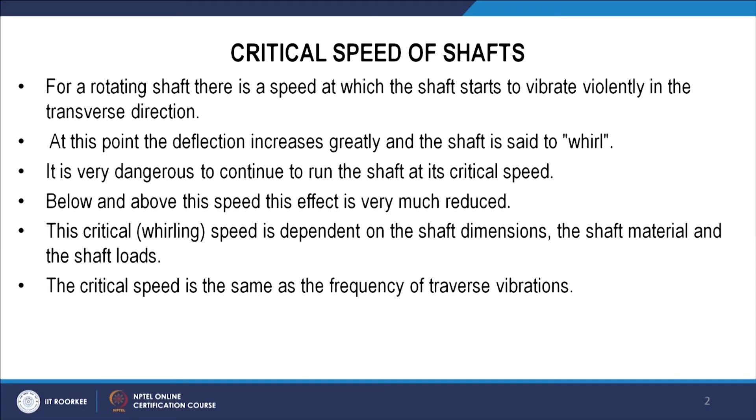When we start the shaft and it rotates, there could be some speed at which its vibration amplitude, that is the transverse vibration amplitude, could be very large, or the shaft can vibrate violently. This speed we call the critical speed of the shaft, and when the shaft is rotating at this speed, its amplitude will continuously grow, and it could be quite dangerous to run the shaft at or near this speed. Below or above this speed, the effect is much reduced, and therefore the amplitude of transverse vibrations are reduced.

So what is this critical speed, and we should try to understand why this type of phenomenon occurs in shafts.

So we can see here, if we have a shaft - these are bearings and this is the shaft, and here is a disc in the middle. We consider the shaft as a light shaft, so that compared to the mass of the rotor, the shaft mass is negligible.

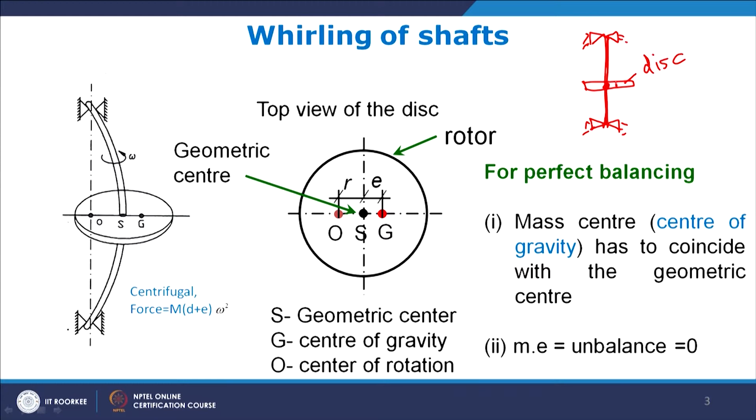However, most of the time, due to manufacturing inaccuracies, the center of mass of the disc is shifted away from its geometrical axis. So it means that if this is the geometrical axis, the center of mass could be here - let us say G. So when G is here, it means the shaft is rotating about one axis and its mass is acting at a different point.

Due to this, there will be some unbalance of the forces in the system, and that will generate the vibration.

So let us say this is O. Now the shaft is rotating with omega, some angular speed. O is the point that is on the center line of the bearings. This is S, the geometric center of the disc, and G is the mass center or center of mass or center of gravity of the disc.

Let's assume that this difference between the geometric center and the mass center is E. This E is called the eccentricity - that is the radial distance between the mass center and geometric center of the disc.

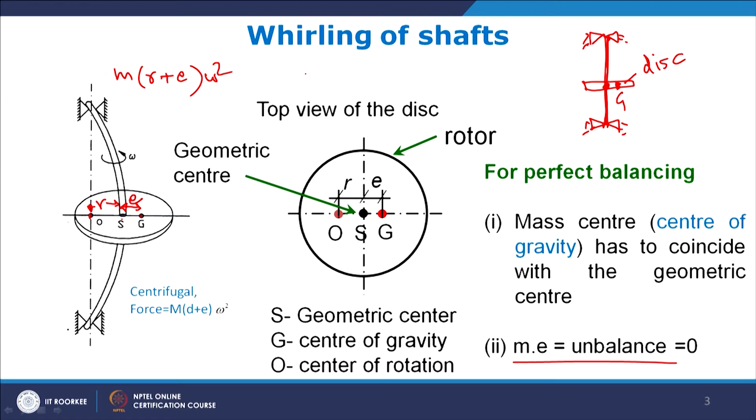Now the stiffness of this system in transverse direction at point S is, if the stiffness is K, transverse stiffness K, and the radius is R, then the restoring force is K into R. So m(R plus E) omega square is the centrifugal force, and the restoring force or shaft resistance force is K into R.

If we assume the bearings at the ends as simply supported, then stiffness K equals 48 EI by L cube, because delta equals P L cube by 48 EI for supports at the ends, and from here we can find K equal to P by delta, that is 48 EI by L cube. So K, the stiffness of this shaft, is 48 EI by L cube.

So for the equilibrium condition, these two forces will be equal.

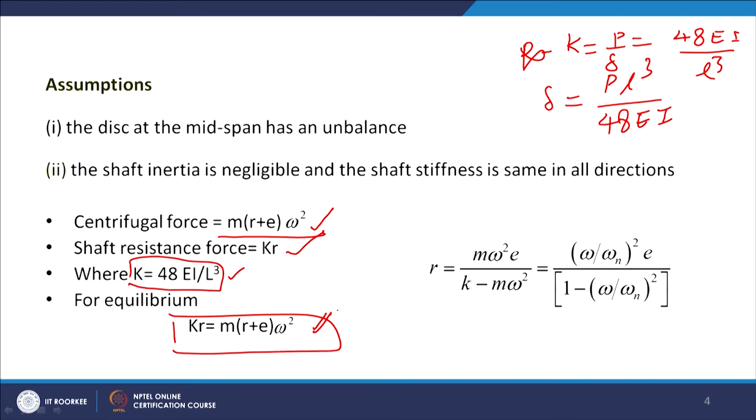So Kr equal to mr plus E omega square, because the shaft is rotating at some speed omega at some distance r, and its mass center is at r plus E from the axis of rotation or the center line of the bearings. So when we balance these two, we will find Kr.

So Kr equal to m r plus E omega square, and from here we will find R. R into K minus m omega square equal to m omega square into E. So from this we can find R equal to m omega square E upon K minus m omega square.

And then we take this K by m, we take this m here, so we have this k by m. So k by m is omega n square. So omega n equal to root k by m. So omega n square equal to k by m. So we can replace k by m with omega n square.

And we take omega n square out. So we will have omega upon omega n square into e upon 1 minus omega by omega n square. So we will have this expression finally that tells us that if the shaft is rotating at this particular speed omega and it has some eccentricity e between the geometric center and the center of mass of the disk or the rotor, and omega n is the natural frequency of the system, then the shaft will rotate with some transverse amplitude r. So r equal to omega by omega n square e upon 1 minus omega by omega n whole square.

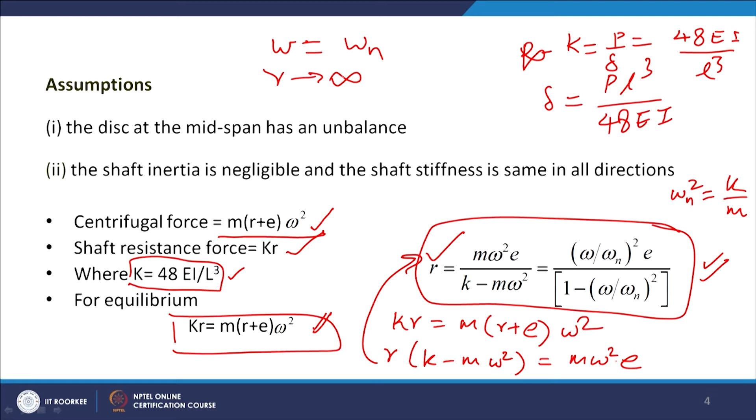Now here we can see that if we have omega equal to omega n, we will have r tending to infinite, meaning the amplitude of vibration will be infinitely large, and this we can see from this frequency curve.

We have here r by e plotted with respect to r, that is omega by omega n. So this r is different: this is the frequency ratio omega by omega n, and this r is the distance of the geometric center from the center line of the bearings.

So we can see that when omega by omega n is less than 1, we have here r by e, and at exactly 1 we are tending to infinite, and then when omega by omega n is greater than 1, we have r by e tending towards 1.

So here, when we have omega by omega n less than 1, or omega less than omega n, we will have this configuration, that is the center of mass is outside of the disk, so the heavy side is here. However, when omega by omega n is greater than 1, or omega is greater than omega n, we have the light side here.

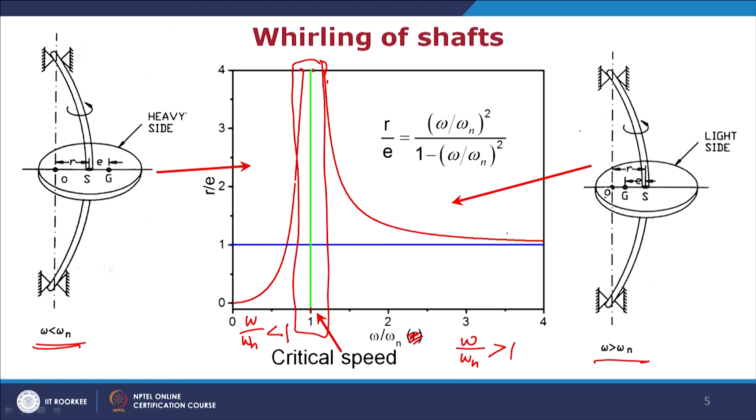Now there could be the presence of damping, and the damping could be due to air resistance, because usually the shafts rotate at very high speed, so the air resistance could be quite high, and therefore there could be damping due to air resistance, or there could be some material damping in different types of applications.

So if there is some damping in the system, then we have to understand that there will be one more force acting on this system due to the effect of damping. And we can understand from here that when there is damping, this point O, S and G will not be in one line, but there are three forces.

So there will be these three points: O, S, G. And we can see that the centrifugal force that acts on G will be acting here, that is m omega square A, where A is the distance from point O to G, and the spring force or restoring force is K into R here, that will work on the geometric center of the shaft.

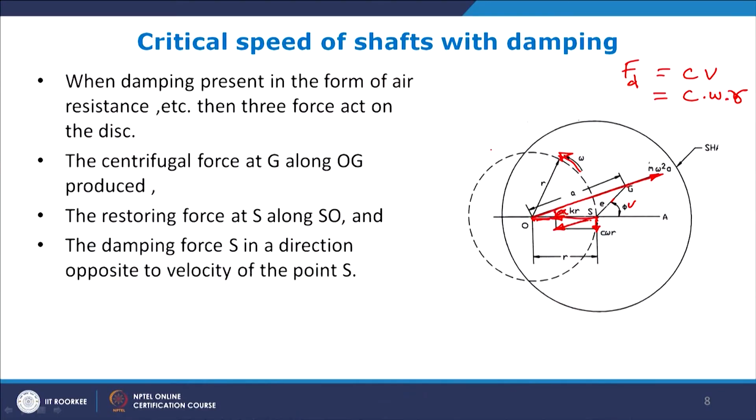Now for the forces, if we want to balance the forces in x and y direction, sigma x equals 0 and sigma y equals 0. There will be some torque acting opposite to the motion of this shaft, coming due to this damping effect, because this damping effect generates torque that opposes the rotation of this shaft. Therefore we need some power source to rotate this shaft against this torque. So for this system we balance forces in these two directions to find these two equations.

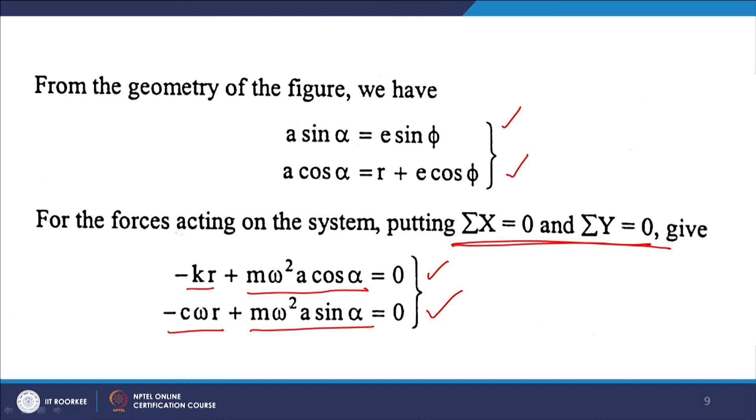One is minus Kr, and then the component of the centrifugal force cos alpha, and here, because this damping force is perpendicular to this restoring force, the sin alpha component of this centrifugal force. By solving these equations, we can get R by E equal to this expression.

So now here we see R by E equals, where omega by omega n is the frequency ratio. Let us say this capital R squared upon 1 minus capital R squared, whole squared, plus 2 zeta r whole squared, under root. And tan phi is 2 zeta r upon 1 minus r squared, where this damping ratio is c upon 2 root km.

If we compare these expressions, we have already seen in the lectures when we discussed vibration due to rotating unbalance, we found x upon m0 E by m equal to the same expression. When discussing the shaft, m0 and m are both equal, and x equals r. So we have the same expressions.

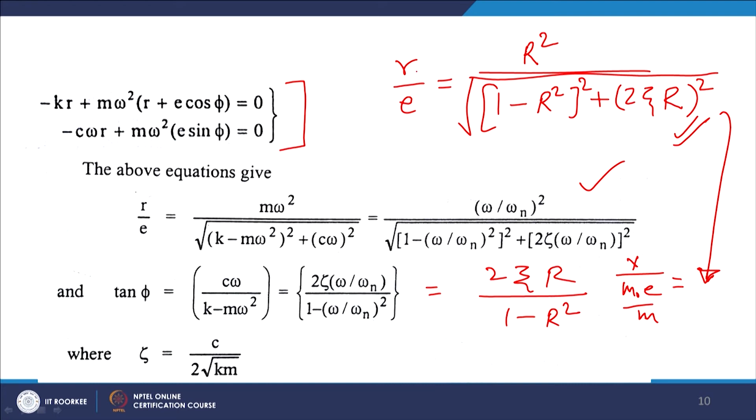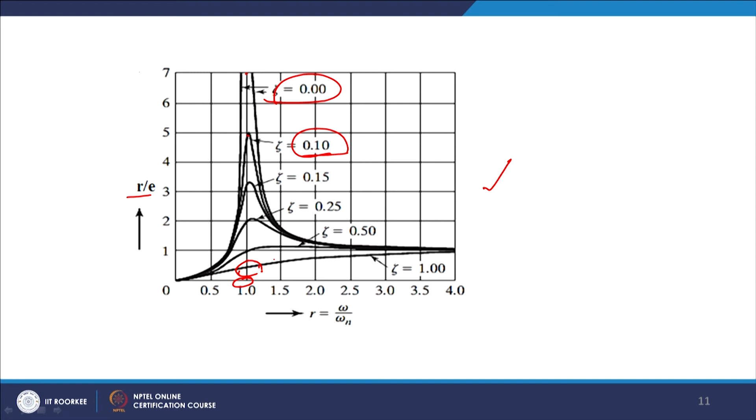Now if we discuss the frequency response curve, this is the same frequency response curve, here it is r by E. We can see the effect of damping: when we have some damping due to air resistance, even at critical speed, that is omega equal to omega n, our amplitude of transverse vibration is not infinite, but finite. When damping is 0, we have infinite amplitude, but with finite damping, even small damping of 0.1, at the critical speed the amplitude is finite, and as we increase damping, the amplitude reduces. So if we have damping in the system, even at critical speed, we have lower amplitude of transverse vibration.

Now we will perform one numerical example to use this concept. Here we have a rotor having a mass of 5 kg, mounted midway on a 1 centimeter diameter shaft, and that is supported at the ends by 2 bearings.

The bearing span is 40 centimeters, so the length of the shaft is 40 centimeters. Because of certain manufacturing inaccuracies, the CG of the disc is 0.02 mm away from the geometric center of the rotor, so E is 0.02.

If the system rotates at 3000 rpm, that is the speed of the shaft or disc, find the amplitude of steady state vibrations and the dynamic force transmitted to the bearings. Neglect damping. Take E, the Young's modulus, equal to 1.96 into 10 power 11 Newton per meter square. So we have to solve this problem.

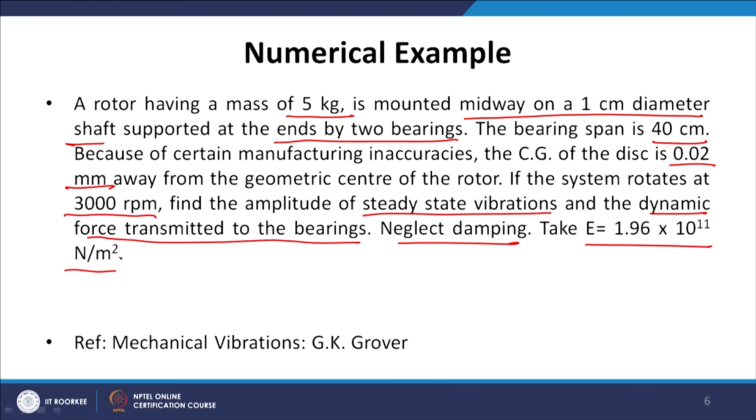So here we are given M equal to 5 kg, the mass, and diameter equal to 1 centimeter, that is 0.01 meter, and then we have length of the shaft, that is 40 centimeter, so that is 0.4 meter.

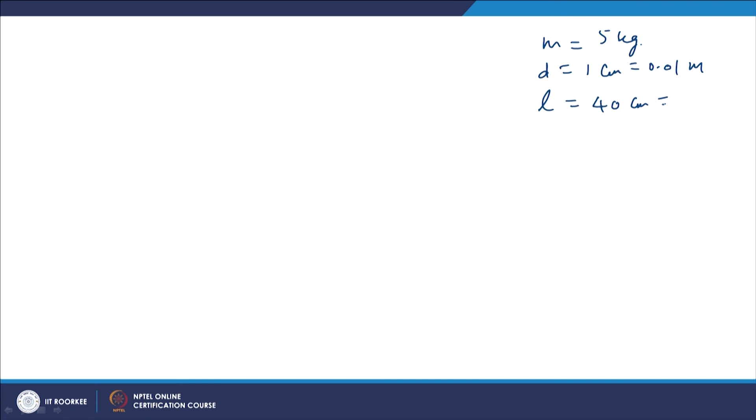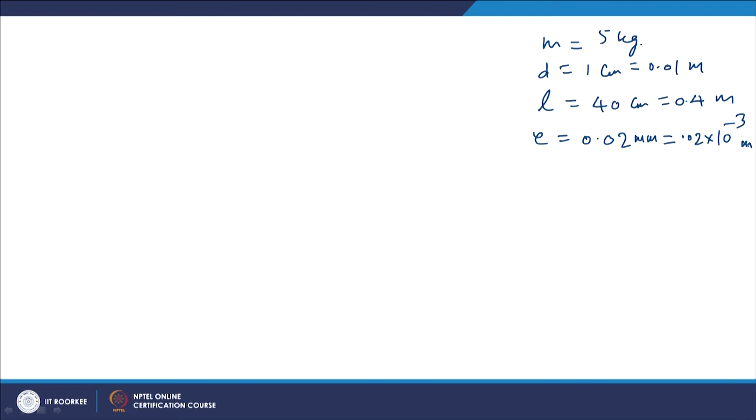And eccentricity E is given as 0.02 mm, or that is equal to 0.02 into 10 power minus 3 meter, and omega, the speed, is 3000 rpm. We want to know R, the amplitude of the transverse vibration, and the dynamic force on the bearing, when we are given E equal to 1.96 into 10 power 11 Newton per meter square.

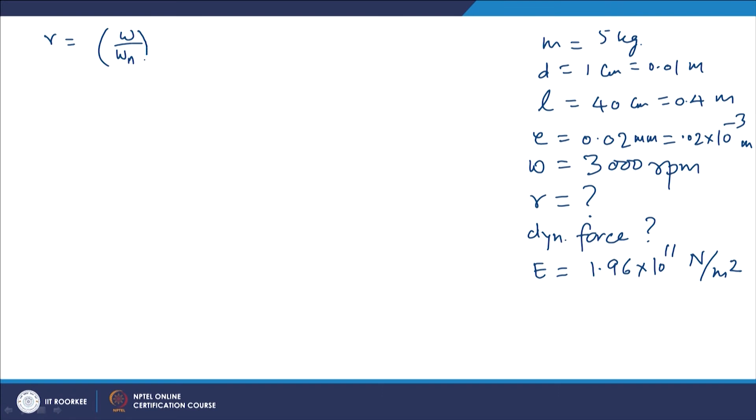So here we know that we have to use our common formula: R equal to omega by omega n whole square into E, upon 1 minus omega by omega n whole square. This is the formula that we have to use. In this we know E, we know omega, but we have to convert omega into radian per second since it's given in rpm. So we do 2 pi n by 60, that is 2 pi into 3000 by 60, and we get 100 pi.

So this is 100 pi radian per second. So we know omega. Now we have to find omega n, the natural frequency of the system. Omega n is root of k by m, and k we have to find. So k is 48 EI by L cube.

Now E is given as 1.96 into 10 power 11, and I is pi d4 by 64. So pi into d4, where d is 0.01, to the power 4, by 64, upon L cube. L is 0.4 meter, so 0.4 cube.

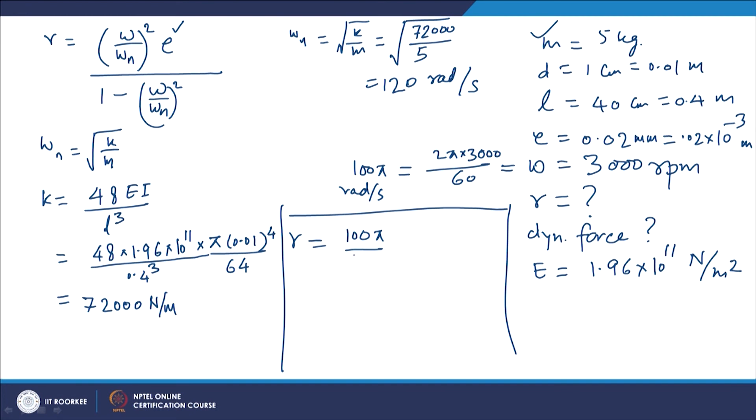So we can put this in the formula to find r. So r equal to 100 pi, that is omega, by 120, whole square, into E, where E is 0.02 into 10 power minus 3, upon 1 minus 100 pi upon 120 whole square. When we solve this, we find R equal to minus 0.0234 mm.

So we are getting a negative sign, which means that the displacement is out of phase with the direction of the centrifugal force. So this is the second case, the light shaft case. Now we have got this R.

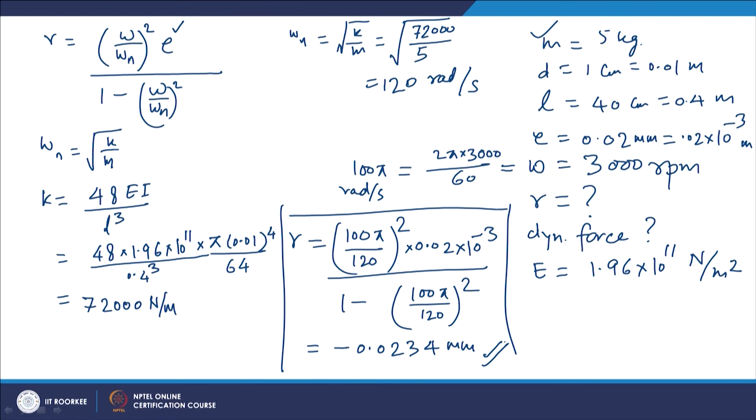Now we have to find the dynamic force on the bearings. The dynamic force is the reaction of the restoring force, because here the reaction force will be equal to the restoring force, and that is equal to K into R, where K is the stiffness of the system.

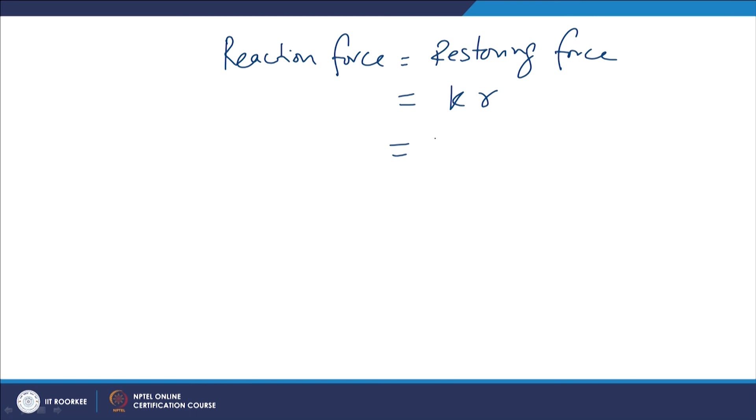So we have got K, that is 72,000 Newton per meter, and R we have got as 0.0234 mm. We multiply by 10 power minus 3 to convert into meters, and so the reaction force we get in Newton is 1.68 Newton. So this is the total reaction force, and there are two bearings.

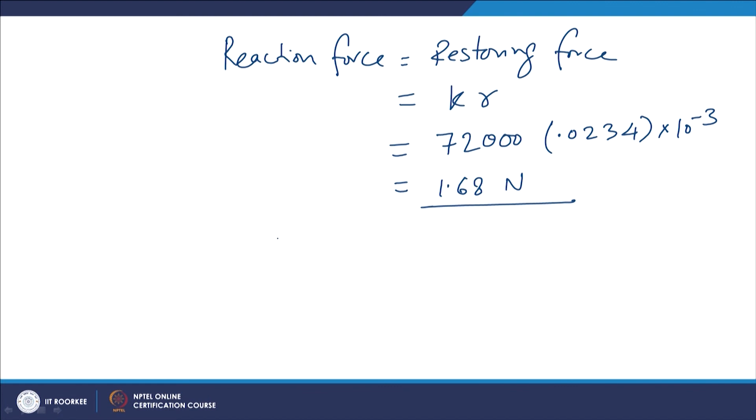Therefore the force will be distributed equally on the two bearings. So dynamic force on each bearing is equal to 1.68 Newton by 2, that is 0.84 Newton.

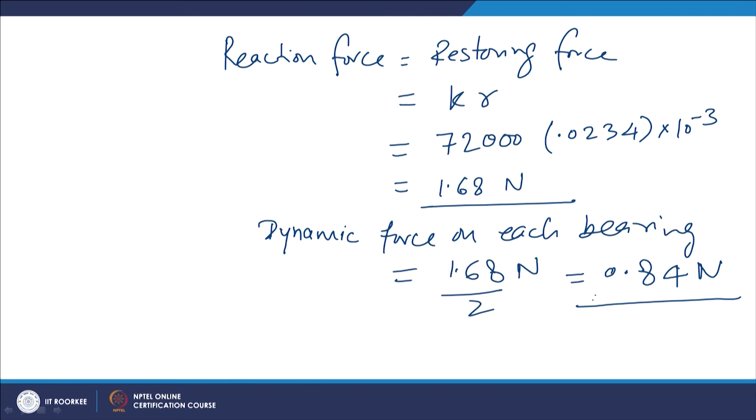So here our shaft is in the vertical plane. Now if this is in the horizontal plane, then we have to also consider the dead weight of the rotor. So this is the final solution of this problem.

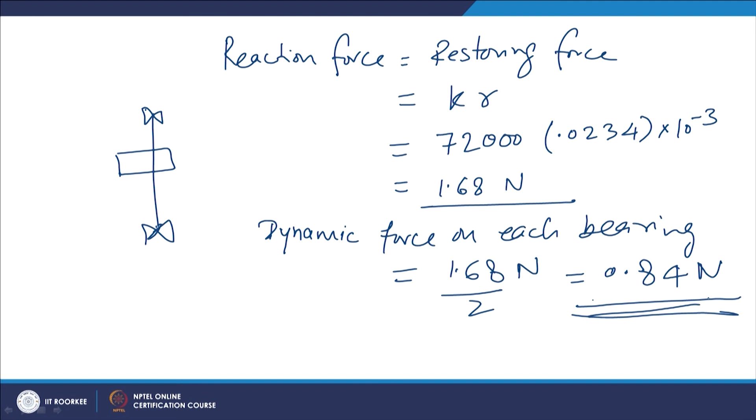So we discussed the critical speed for undamped shaft system and damped shaft system. So now we stop here, and we will continue this lecture in the next. Thank you for your attention.